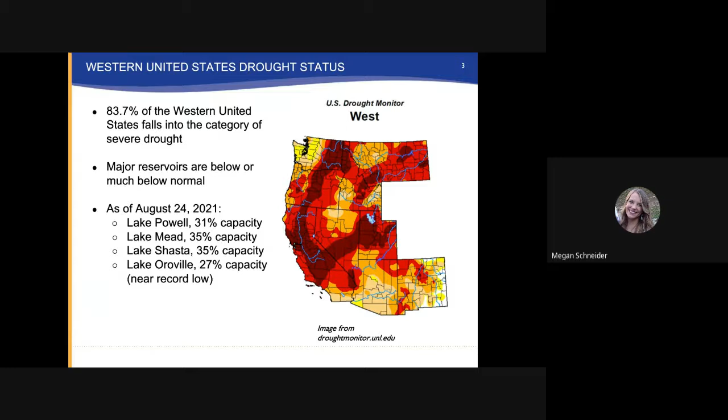Much of the western United States is experiencing drought and continued dry conditions. According to the U.S. Drought Monitor, 83.7% of the West falls into the category of severe drought, with many of its major reservoirs below or much below normal. For example, as of August 24, 2021, major reservoir Lake Oroville is at 27% capacity, which is near a record low.

An overview of California's drought status: On April 21, 2021, Governor Newsom first declared a drought state of emergency. This was first for Mendocino and Sonoma counties and has since been expanded to 50 out of 58 of California's counties. Counties not included under the proclamation are Ventura, San Francisco, Los Angeles, San Bernardino, Riverside, Orange, San Diego, and Imperial. Although not included under a drought emergency, funds for water projects are still available to all counties.

Governor Newsom is calling on Californians to voluntarily reduce water use by 15% compared to 2020 levels. Many cities in Northern California, such as Folsom, are tackling the shortage by entering a higher water shortage stage and implementing new water restrictions and enforcement.

In the Southern California region, Metropolitan Water District has declared a water supply alert. They are calling for all water agencies to voluntarily reduce their demand by 15% through conservation and public awareness campaigns, which is in line with the governor's call to action. If conditions do worsen, Met could declare a water supply allocation alert and could impose financial penalties.

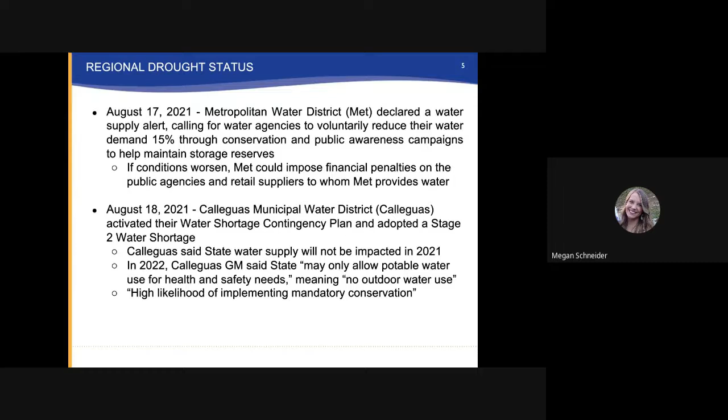The city's current water supply portfolio is as follows: 25 to 30% is local groundwater pumped and purchased from United Water Conservation District. 25 to 30% is local groundwater pumped by the city. 40 to 50% is imported water purchased from Calleguas Municipal Water District.

The available groundwater supply is controlled by Fox Canyon Groundwater Management Agency. The GMA manages the groundwater basin by controlling groundwater pumping allocations in an effort to protect the basin and reduce groundwater pumping to a safe yield. Therefore, the amount of groundwater that can be pumped by the city and United is limited. There will be more presented on this specific topic in a future council report.

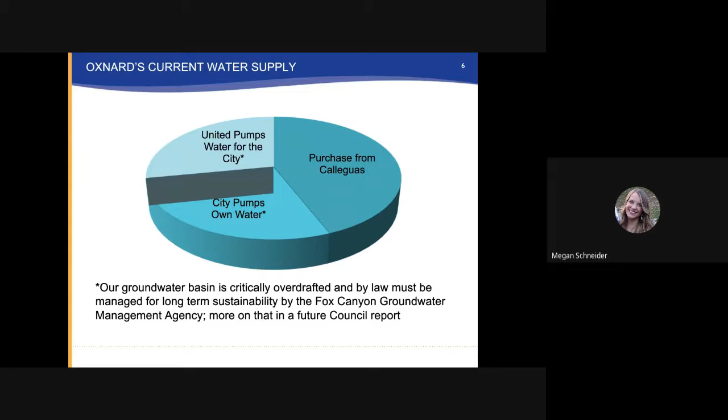The Oxnard Water Division has been in contact with nearby water suppliers to stay up to date on actions taken locally. The city of Camarillo is considering declaring a level 2 water shortage, which would limit their watering outdoors to 3 days per week, prohibit the filling of ornamental lakes, and require leaks to be fixed within 48 hours. The city of Ventura is not currently in a water shortage stage, but continues to actively prohibit water waste activities and enforce their permanent water conservation restrictions, such as no washing or hosing down of driveways and sidewalks, and no watering within 48 hours of rainfall.

Simi Valley recently declared a level 2 water shortage stage, most notably limiting their outdoor watering to 3 days per week.

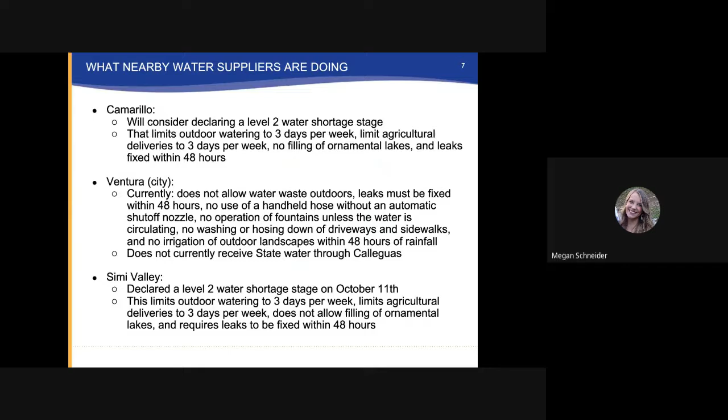The city has permanent water waste restrictions which fall under Oxnard City Code Chapter 22, Article 8, Water Waste. These permanent restrictions include prohibited activities such as outdoor irrigation during a rain event and the use of running water from a hose pipe or faucet to clean hard surfaces. As well, all leaks must be repaired within 72 hours of discovery.

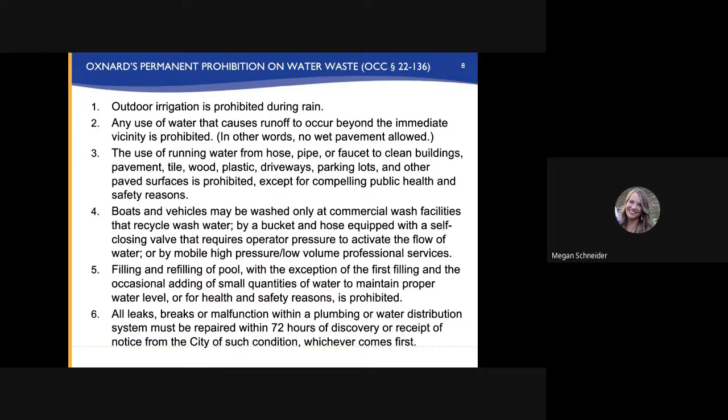Additionally, all service of drinking water at a restaurant or other food service establishment can only be made upon customer request, and all food preparation establishments must use water-conserving dishwasher spray valves when washing dishes.

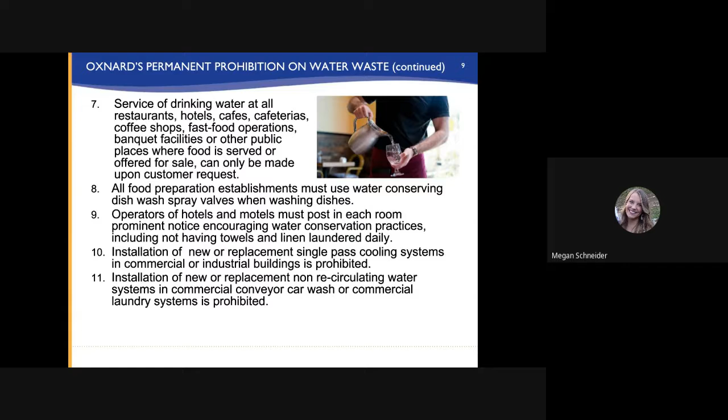The city of Oxnard has remained in a declared Stage 2 water shortage since 2014. Water restrictions currently under Stage 2 include a watering schedule of twice a week, with days determined by address number. Watering should only take place between 4 p.m. to 9 a.m. standard time, or 6 p.m. to 9 a.m. during daylight savings.

Exceptions include watering of newly installed drought-tolerant landscapes up to a year after planting, and hand watering of potted plants or stressed vegetation.

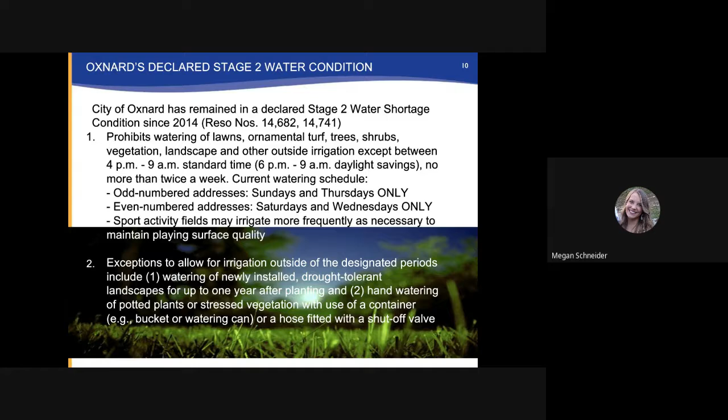Some additional restrictions included under Oxnard's Stage 2 water shortage include no watering during and within 48 hours of a rain event, and no potable water used for decorative water features unless utilizing a circulating system. Permanent water waste restrictions are still in place regardless of stage.

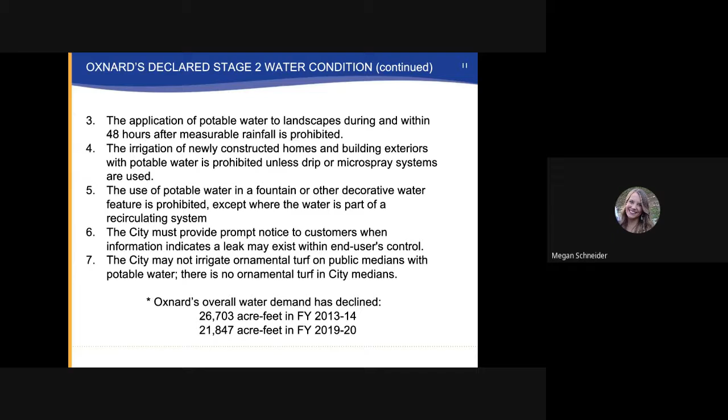Oxnard's overall water demand has continued to decline since adoption of the Stage 2 water shortage, from 26,703 acre-feet in fiscal year 2013 to 2014, to 21,847 acre-feet in fiscal year 2019 to 2020.

The Curbside Contactless Water Conservation Program was launched in 2020 in light of the COVID pandemic. This program offers customers a customizable water conservation kit they can pick up safely with no contact from our water campus. In 2020, 166 kits were distributed. This month, in October 2021, we are on target to distribute over 900 kits.

Water-saving classes, rebates, and school assemblies are also offered. Communication platforms utilized include the city's social media outlets, DMV advertising, and the Chamber of Commerce guide.

Oxnard's water supply planning includes the 2020 Urban Water Management Plan, which details long-term resource planning to ensure adequate water supplies, and the 2020 Water Shortage Contingency Plan, which outlines response to the various stages of drought or prolonged water shortage caused by other events.

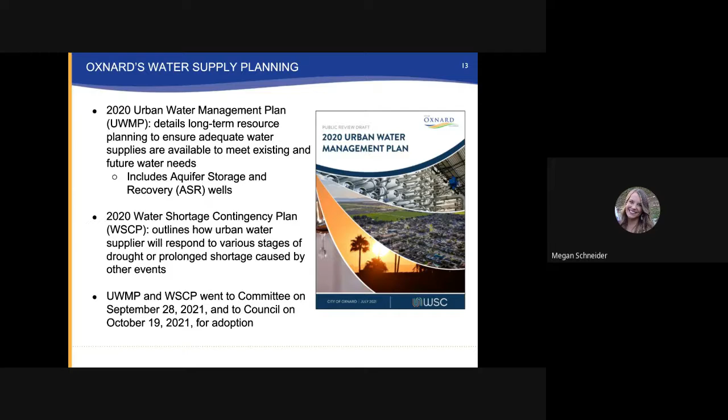An outlook on Oxnard's water resources: the City Council can declare a water shortage, the severity of the shortage, and establish the conservation measures in line with the declared shortage. The severity of the shortage is designated in stages, and each stage corresponds to the degree to which the city has or is likely to suffer reduced availability of water supplies.

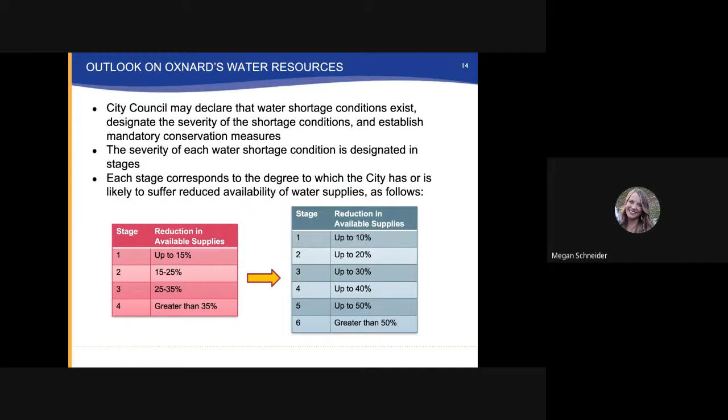To the left of the screen is the city's current 4 stages, and to the right of the screen is the proposed 6 stages, in line with the 2020 Urban Water Management Plan and new state guidelines.

Looking into the future, water staff such as the Water Division Manager, Water Resources Manager, and Water Conservation Supervisor assess water supply projections annually, and assess if there are water supply reductions and the total supply available versus future demand.

Information is presented to council, and council may then declare a water shortage condition. When council declares a shortage exists, council must also designate the severity and establish mandatory conservation measures, which the staff will recommend. The city may issue warnings and impose penalties on any violation of prohibited water waste activities.

Staff is currently performing studies for the future use of desalination, water banking, and stormwater capture and treatment. Any change in the ordinance, or any projects such as building storage tanks for conservation efforts, would require council authority.

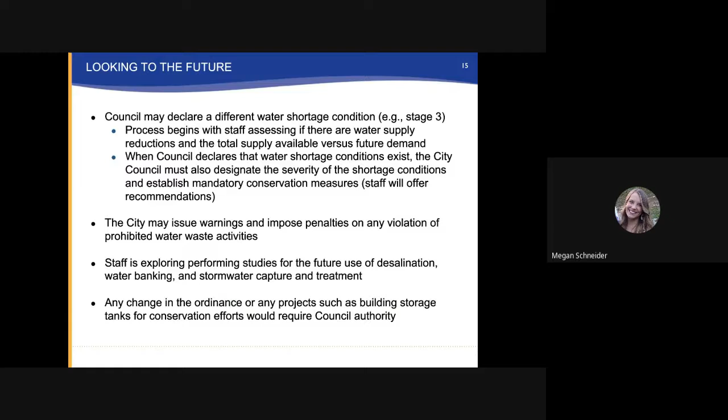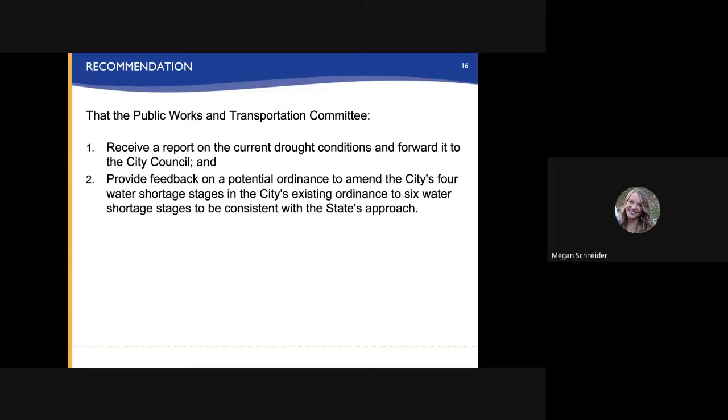Again, the recommendation is that the Public Works and Transportation Committee receive a report on the current drought conditions and forward it to the City Council, and provide feedback on potential ordinance to amend the city's 4 water shortage stages in the city's existing ordinance to 6 water shortage stages, to be consistent with the state's approach.

This concludes my presentation. I am happy to take any questions during the Public Works and Transportation Committee meeting of October 26, 2021, and the City Council meeting of November 16, 2021.